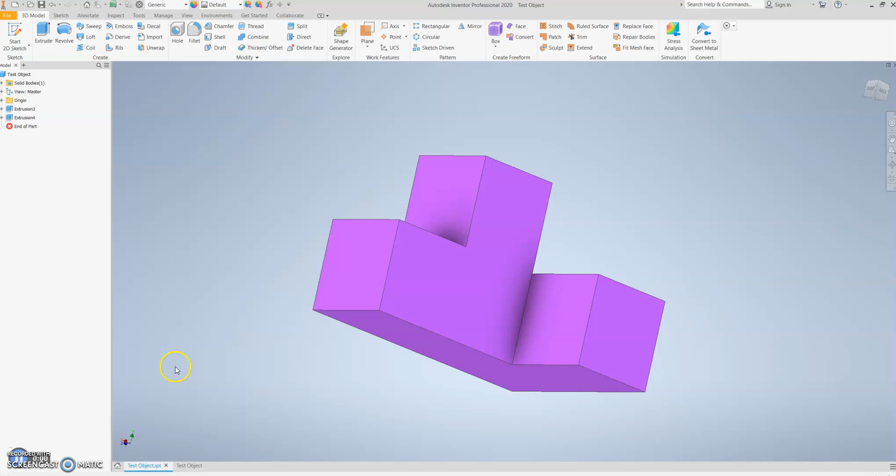Now that the piece has color, and we've done this for all of our pieces, we need to figure out how to actually give a drawing to someone who could produce them if they were doing this out of a solid. So what we're going for is those orthographic, isometric multi-view drawings with our orthographic projection in that L shape, and then the isometric in the upper right-hand corner here.

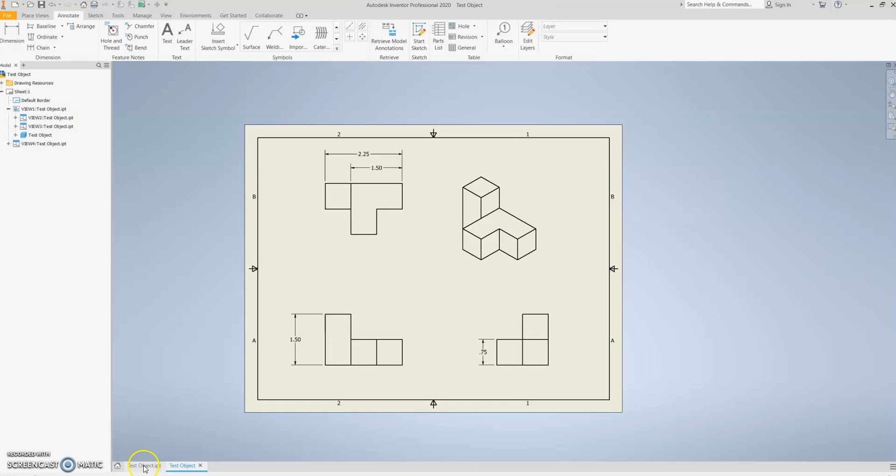So we're going to do that from our 3D models now. Here's my 3D model file, and I will go File, New, but rather than doing the standard IPT, which is the standard part file we've been doing, I'm going to do this standard IDW file down here, and I'll double click on it, or you can click on it and hit create.

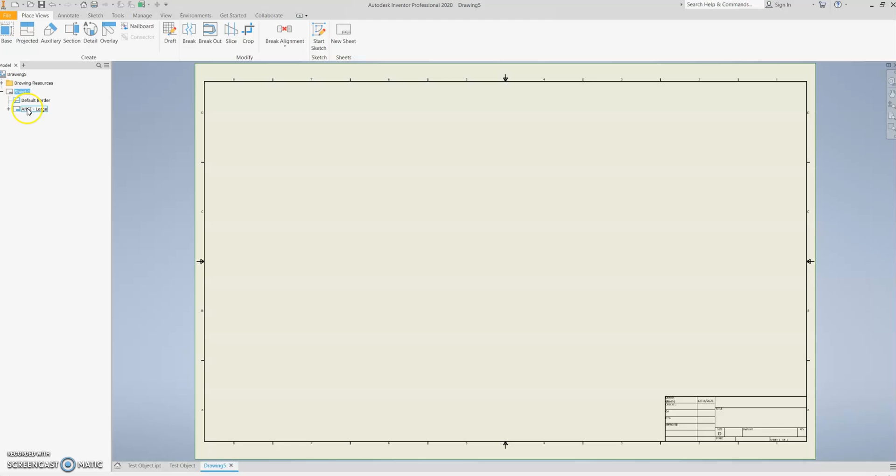Either will work. This default paper is actually kind of large, so we're going to edit a couple things before we get going. I'm going to right click on sheet 1, right click and hit edit sheet, and I want to select size A landscape view. So I still want the paper to be sideways, but size A paper is 8.5 by 11, which is our standard paper, so we can just use normal paper. And then I'll say OK.

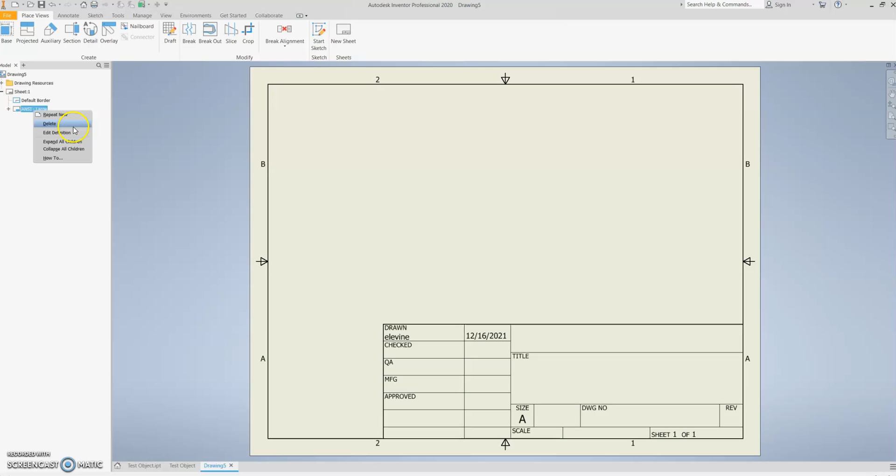So it'll shrink down. But now this heading here, most of which we'll be leaving blank, we'll put some other stuff on it at a later time. But I'm going to delete this. So I'm going to right click on ANSI large, and I'll delete it. So that's just gone. We'll put something of our own there later on.

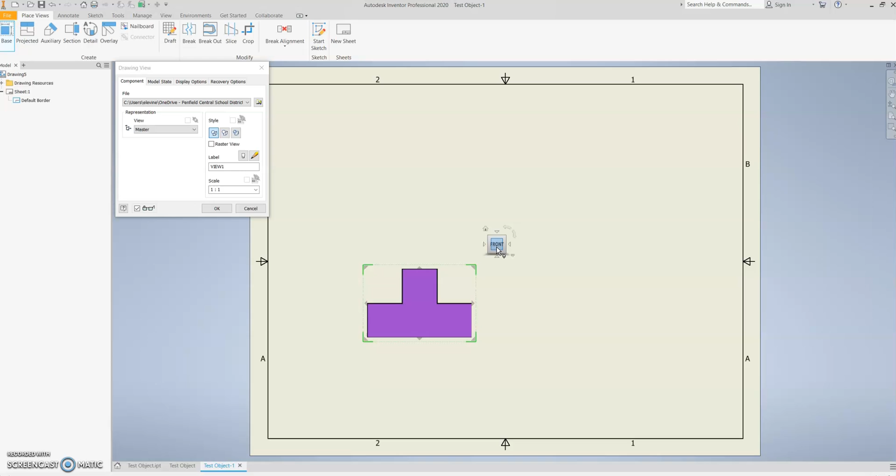So I've got this all set up here. I'm going to now put my base view, which it will let me place where I want it. And this by default says front, which is from whatever it was in the CAD drawing. But I'm going to rotate it until I get a drawing that I want to use as the front. And I like this as the front because I don't have any hidden lines, and I want to try to avoid hidden lines in my front view and show the most shape of the object in that front view.

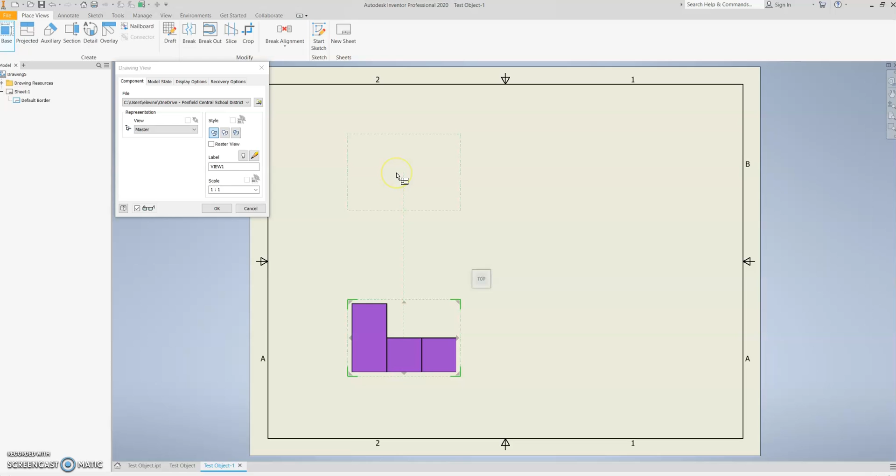Now if I just move my mouse up, straight up, I see that dotted green. That's going to project to my top view. And then I go over here and I can project to my right side view. And if I go up to this corner, it'll project to the isometric drawing. Now I can say OK, and we're going to leave it at scale 1:1 because we shrunk the paper so this would fit nicely. So I'll say OK, and it did that drawing.

What is nice is I can move things around as I need to. If I click on the border that's around the drawing, the dotted border, it'll adjust the location of my projections. Or if I decide that your front view is not the best choice, you can double click on it to bring this menu back up, and you can change that from there.

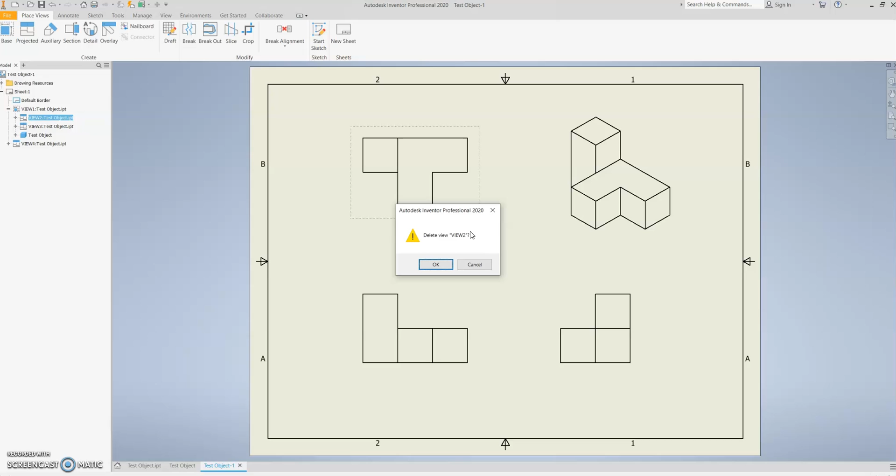If you didn't put one of your views, for example, if I forgot my top view, I can click on projected, click back on this front view, and then just move up, and it will just recreate that if I go right click, create. So I just made that view back.

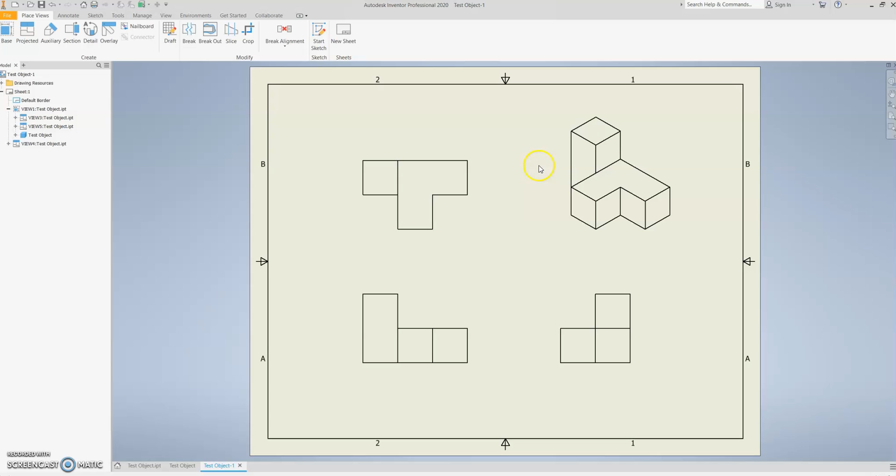So this is how we're going to get our orthographic and isometric drawings set up. Next we're going to talk about adding dimensions and text.